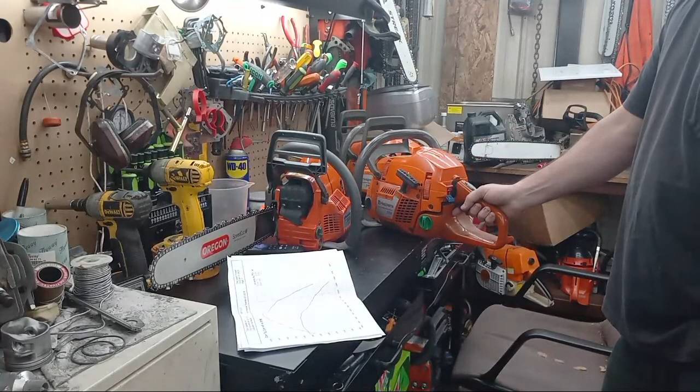My buddy Tanton has already laid claims to this, so I'm going to be shipping this saw to him. You know, I've got it running pretty good. It did some good dyno pulls. It's very broad-banded. Pulls like a freight train.

Very, very pleased with that. I think with the different cylinder and slightly different port work, I think there's more in one of these. But all in all, this is an excellent work saw.

It's a little heavier than the 346, but I think it's lighter than a 620. So I don't know, and it's got the freight train pulling power of a mildly ported 620 right now. So I'm pretty pleased, I'm pretty pleased with that.

I hope Tanton likes that. I'll be sending him with the stock muffler, and I picked up a backup cylinder for that as well, I'll send him just in case that cylinder ever has problems. All right, what's the next one that you guys want to know about?

The 543. All right, very happy with this. She put up 5 horsepower. Out of all the pulls it did, the average, they averaged them all together, it was like 4.84. It's pretty much 5 horsepower.

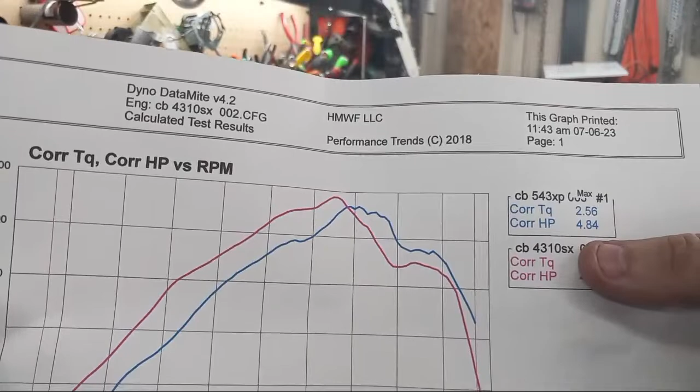I can show you the dyno sheet on this too. I had him pull up one of my 4310 pulls as well to kind of give you guys a comparison. There's the vanilla blue. I didn't catch that, the no blue something.

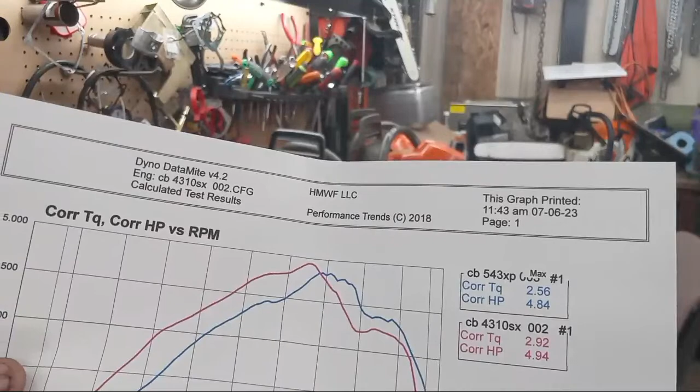I don't know what you're talking about, buddy. I'm doing good to get the phone to go live for me. I'm amazing, I don't screw that up.

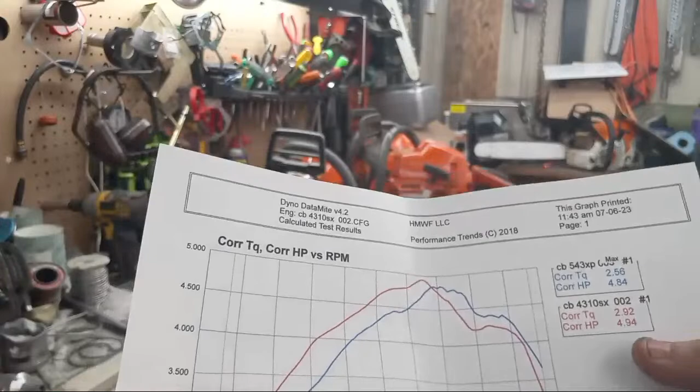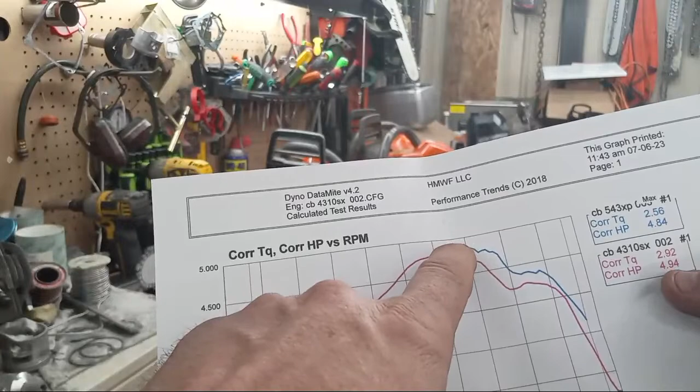This pink one is the 4310. I got a slight bit more on the 543, I stretched the RPM out just a little bit more. I did that on purpose. I suspect Indiana Doug's...

This needs a carburetor and a muffler mod. This is the same saw but a clone. It's got the non-working carburetor back on it, and I didn't feel like doing another muffler mod, so I just traded them mufflers. But this is all ported up. The numbers on this one are slightly different than this one. I suspect this one would probably have slightly more torque, and it will probably have more of the RPM band of the 4310. I really can't wait for Doug to get this back, and I guess he's got a carburetor on the way, and then he'll do his muffler mod. I think he's going to enjoy that little saw.

I used it as a test platform to see which way I wanted to go with this. This saw is a little scooter, she books through the wood, I love the thing. And I love my 4310 as well. But 5 horse out of 43 cc's, I'll take it. Let me know what you guys think of that.

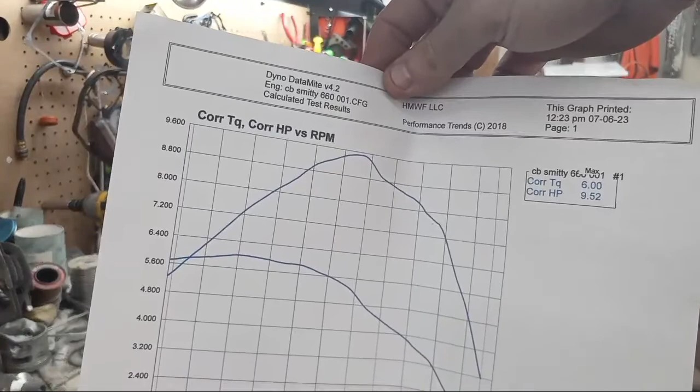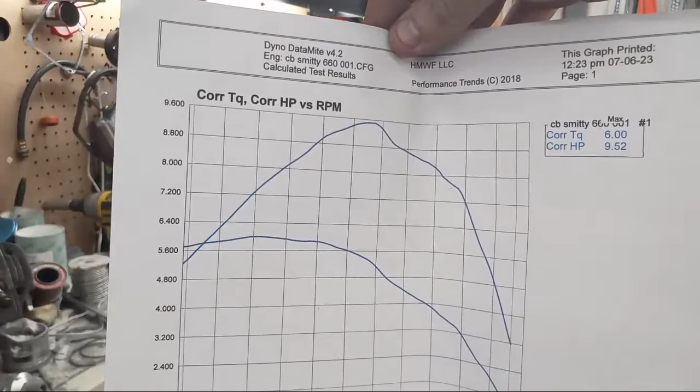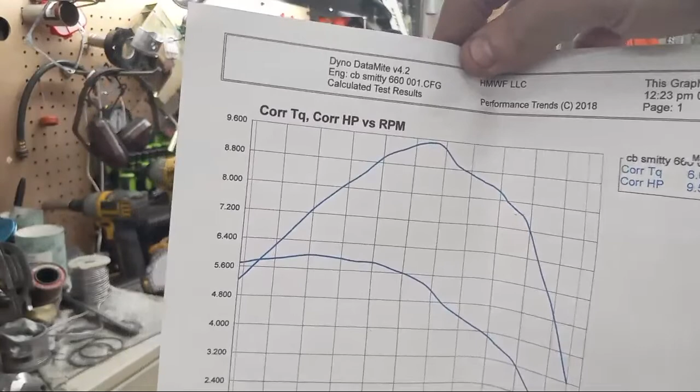But here's Smitty's dyno pull for that 660 that I pieced together for him to run there at Clone Wars at Sawfest. Should do pretty respectable, that's with no piston work either. That's just all machine work and porting right there, and a muffler mod. And that's with stock air filter stuff on it too. He'll have to get it dialed in, get the chain where he wants it, and figure out what size rim he wants to run on it. But it should be a pretty stout saw.

The torque on that, it's saying 6 foot-pounds. Yeah, it's looking like six foot-pounds on that. I'm not very good at reading the chart, but where it made the 9.52 horse, it was producing 6 foot-pounds of torque at that as well. It should be a good runner.

That Neotech 365 that I fixed up and got running. Yep, I know that, JK. I wouldn't say it's a monster 660, it's a stout 660. Hey, there's Tanton, I just gave the results on your 359 Tanton just a little bit ago.

But the 365 that I did put up 7.5. Where's the chart with that? I'm pretty bummed out with the 562 build. It is giving me all sorts of running issues. I don't know if that carburetor's not happy.

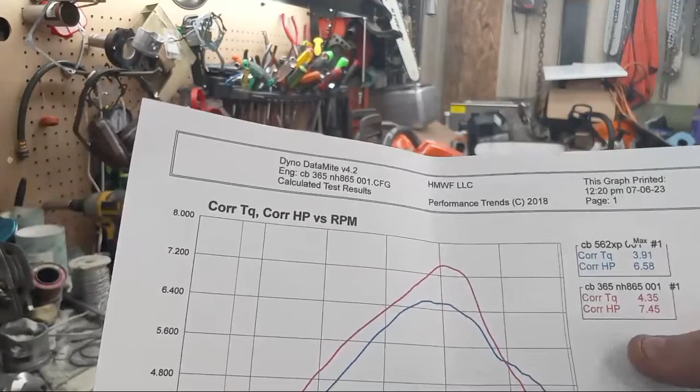There's the 365, 7.45, that's close, 7.5 horse. I did see 7, I think the best pull it did was 7.5, but he does a bunch of pulls and then averages them. The 562 put up 6.58.

I'm not done with that 562. If I can't get the bugs worked out of it, I will buy another cylinder and attack that saw a different way and see what happens. I'm persistent, if anything.

I've never done a 288, so I have no idea, I don't have any data. My best pull on a 372 has been 8.7 horsepower, and that was on a 50 millimeter bore.

The big bore saw I sent to Chad Jackson, the one Bodie did a video on, I think that one's right around 7.5 horse. I didn't go nothing crazy, it's just a mild work saw build, so it's probably pretty close to that 365 I just built.

But my stoutest 372 is that white one. I haven't had the orange one back on the dyno since I revisited it, but when I did timed cuts, they were the same timed cuts as my white one.

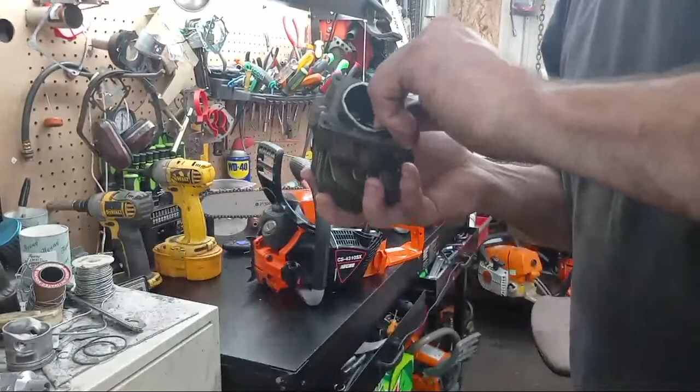I will be going back into the 562. A buddy of mine gave me a stock cylinder here. It's got a little bit of scuffing in it and stuff. I think I can salvage it, and then I can put some numbers in this, and I'm going to flip and flop things around on a 562 and see if I can get a little bit more torque out of it.

Them 400s are animals. I don't know if you guys know, but that 400 put up like 8.8 horse. My white 372 clone, that was 8.7.

I've looked at a 4920, but I've never had one torn apart. I know they're a clamshell. Kind of bummed about that.